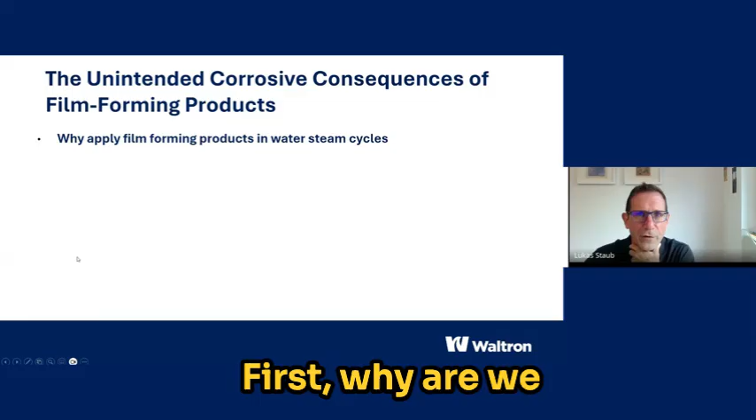Give you a quick overview on what we're going to talk about today. First, why are we applying film formers in water steam cycles? I just want to mention this is not a presentation of different film forming amines, film forming products. This is looking at the consequences of the applications. We have to look at what are the different FFAs and FFP classes that you find in the literature, and then what are the effects of FFPs, how do they work in general.

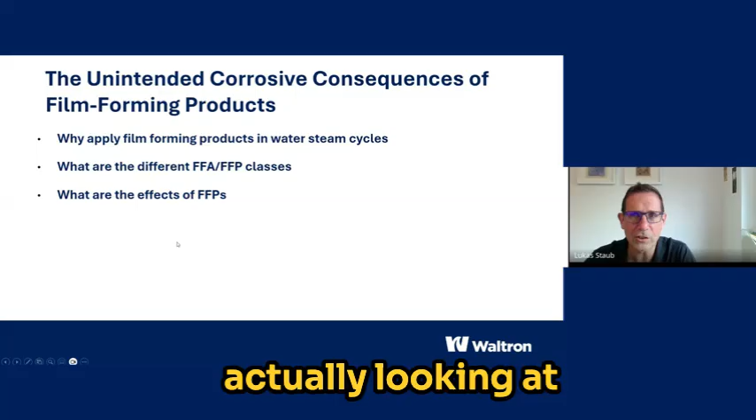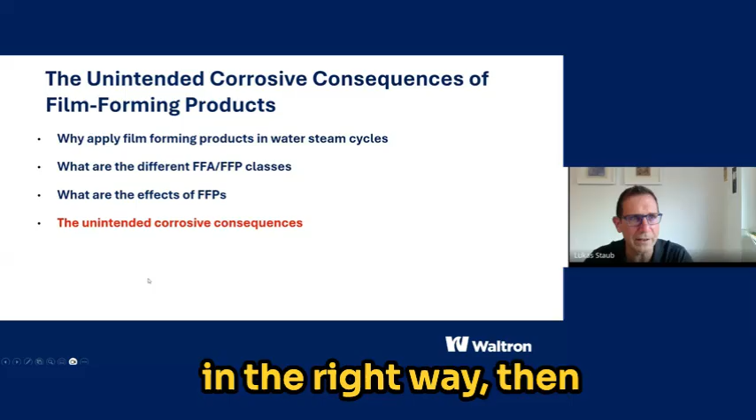Again, I'm not going to go into the deep chemistry of the different products. The vendors of those need to do that. And then what we're actually looking at is the unintended corrosive consequences. It had this undertitle in the advertisement of the webinar, the unintended corrosive consequences of film forming products. Again, the chemical mechanisms and what the corrosive consequences are if FFPs, FFAs are applied, overdosed, or not applied in the right way - we're not going to go into too much detail.

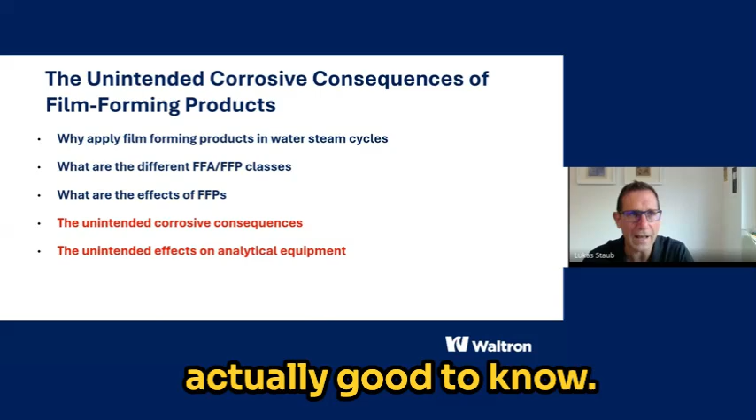Where we're going to dive in a little deeper is the unintended effects on the analytical equipment. This is an interesting field, and we as an instrument manufacturer have done some studies that are, of course, showing some effects on instrumentation, and these effects are actually good to know. We're also going to talk a little bit about mitigation strategies. Again, this is focused on how do I make my equipment run reliably, rather than the unintended corrosive consequences and how to mitigate that - that's other experts' field to deal with.

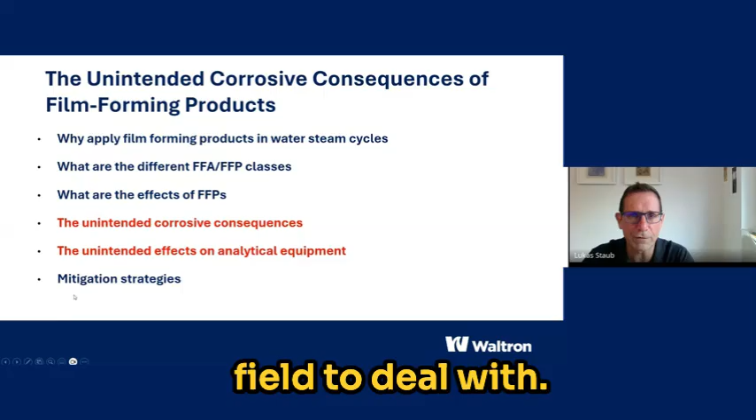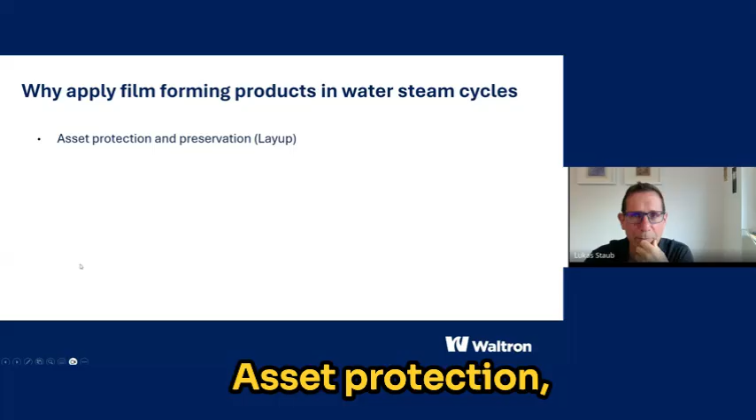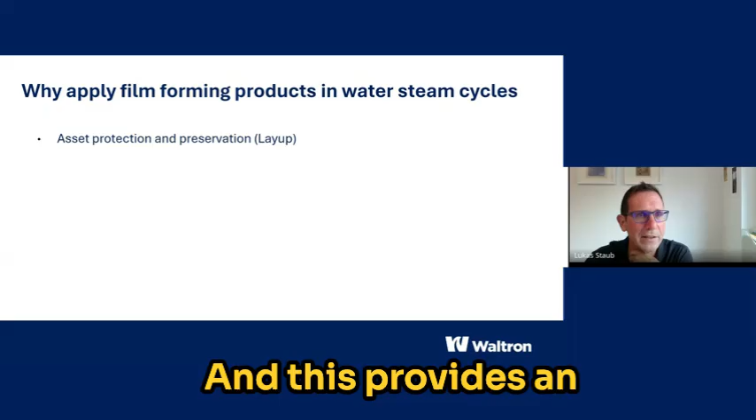Now, why do we apply film forming products in water steam cycles? There is a couple of commonly known reasons for that. Asset protection, preservation of layups. Film forming products establish a barrier that remains intact during operation, but also in offline periods of plants, and this provides excellent protection during operation, but also when you're looking at wet and dry layups without the need for extended nitrogen blanketing or dehumidification of the whole installation.

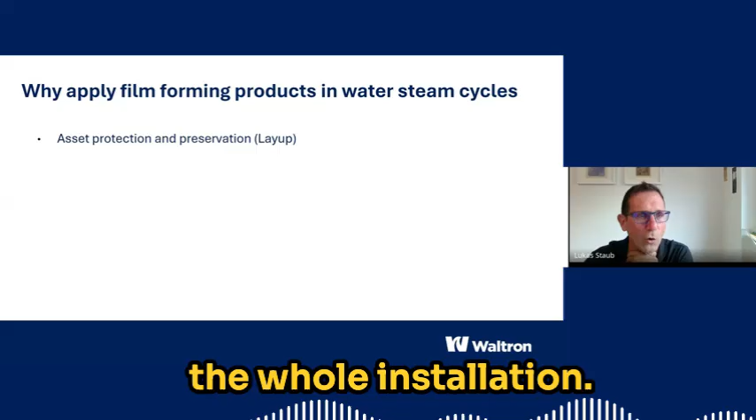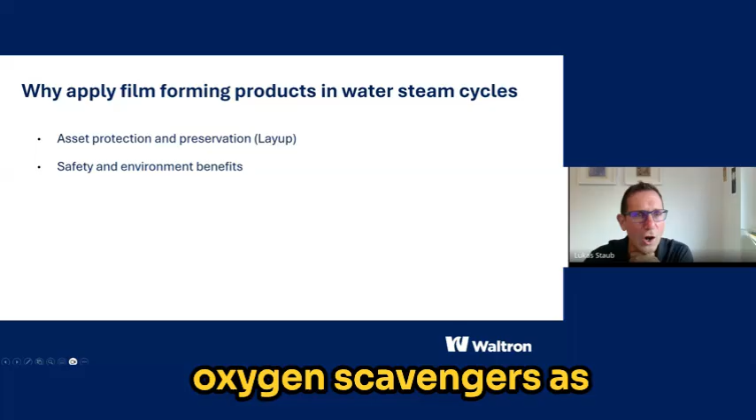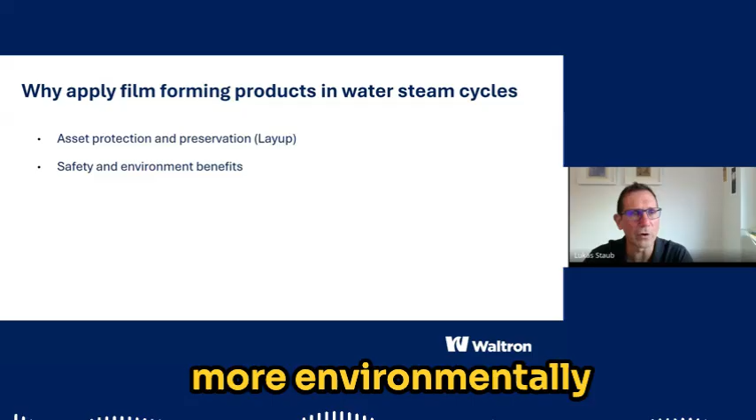Sometimes people also talk about safety and environmental benefits. This is mostly related to plants that are applying oxygen scavengers, as some of these FFPs and the mixtures of products that are applied then are said to be less toxic and more environmentally friendly than, for example, hydrazine when that is in use as an oxygen scavenger.

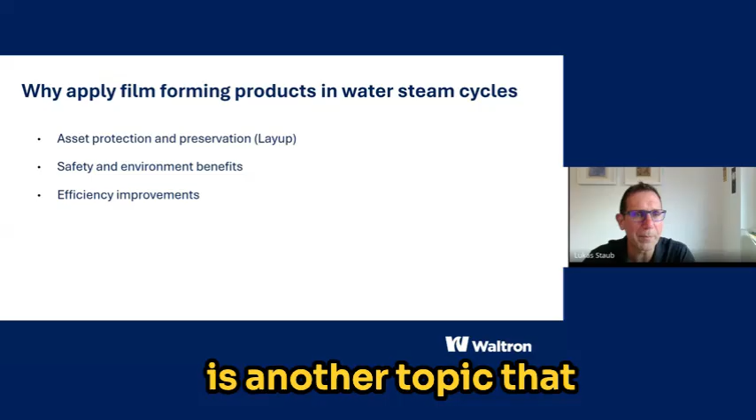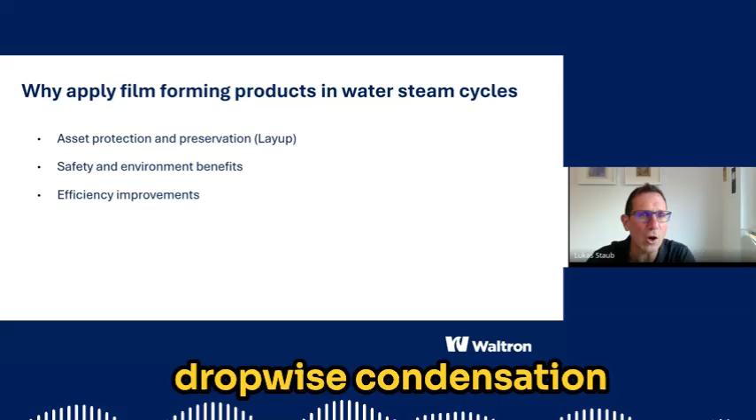Improved efficiency is another topic that some people like to talk about. By keeping heat transfer surfaces clean with the application of an FFP or an FFA, and promoting actually a drop-wise condensation rather than a film-wise condensation, for example in condensers, that could actually significantly improve the efficiency or the heat transfer.

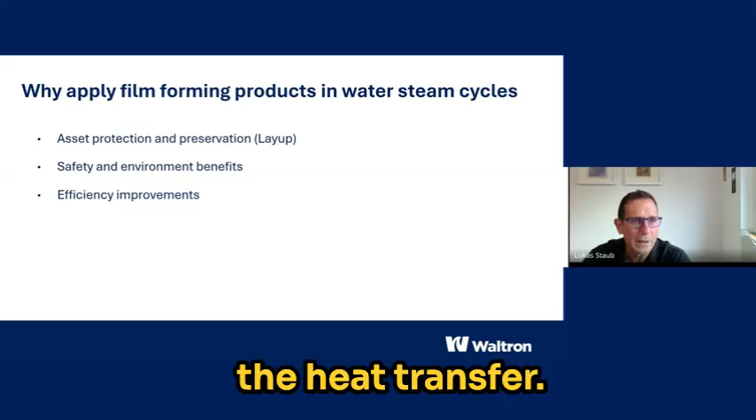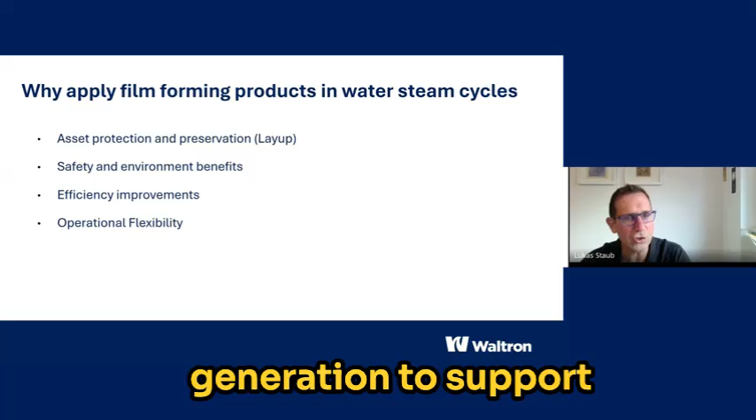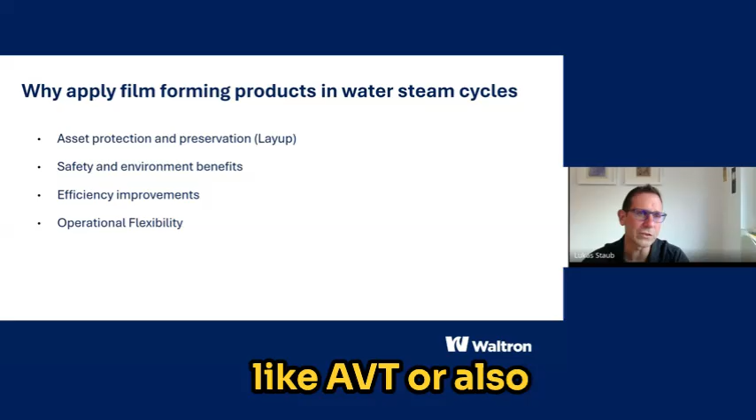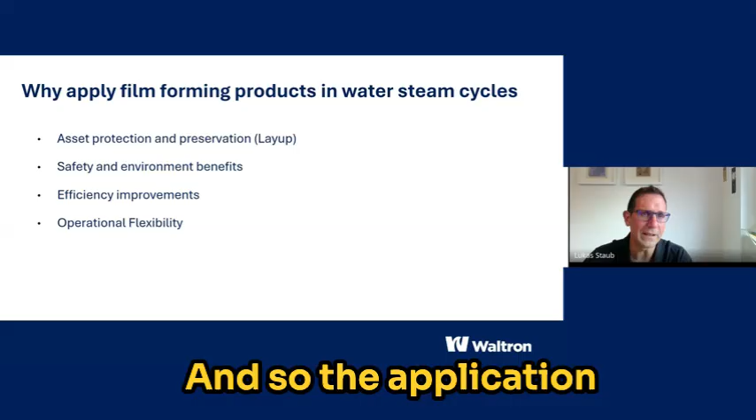Another topic that people mention when applying FFAs a lot is operational flexibility. As power grids shift towards flexible generation to support renewable energy, plants experience more frequent startups and shutdowns, peak shaving operations. Traditional treatments like AVT or phosphate treatments in boilers have limitations in protecting assets when you're looking at the cycling operation of these plants. So the application of FFA can, in certain circumstances, actually support the mitigation of corrosion formation in those plants.

What are the different FFA classes? We generally find three different classes in the literature. The literature talks about film-forming amines.

They're called in the literature FFAP. These are commonly blended products that contain an active film-forming amine, an FFA essentially, combined with other components like alkalizing or neutralizing amines, emulsifiers, reducing agents, and so on. Details on that are a topic for the suppliers of these substances.

The last class found in the literature is the film-forming products, the FFP. These are products that have the same film-forming properties, but are not amine-based. They often belong to a surfactant family, may contain carboxylate groups, and so on.

At the end of this presentation there are two pages with references of documents that can help you get an overview of what kind of products are available and what classes of products are applied in various situations of operational plants, and what kind of plants you're looking at.

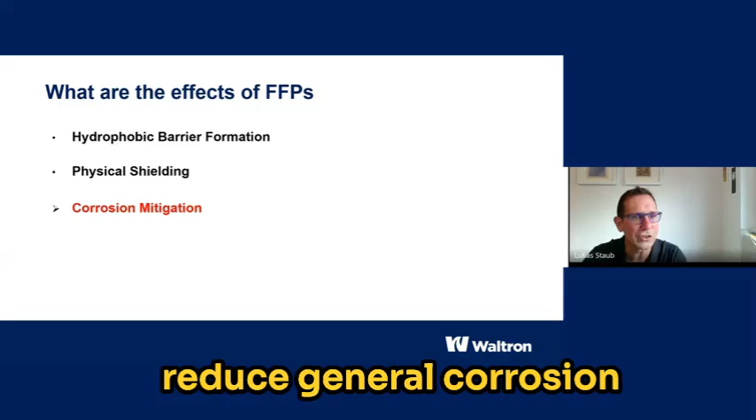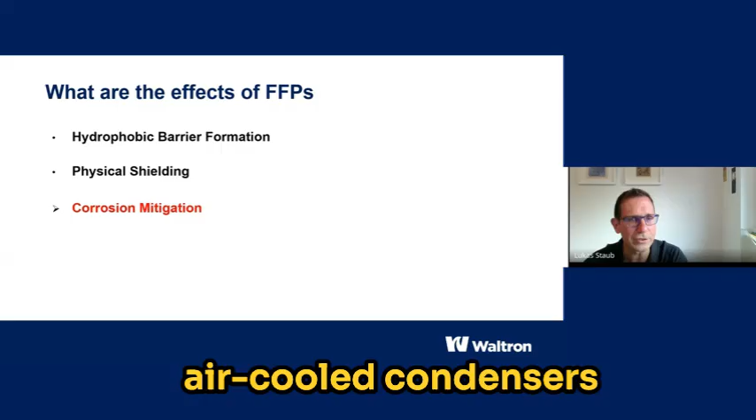So in general it can be said that both of these mentioned effects are intended for corrosion mitigation. The FFPs intend to reduce general corrosion, mitigate flow accelerated corrosion in both single and two-phase environments, like what we can find in air-cooled condensers and heat recovery steam generation.

Now, just a really quick overview of the unintended corrosive consequences if those FFAs are applied in the wrong way, in the wrong application, in the wrong plant, in the wrong dose maybe as well.

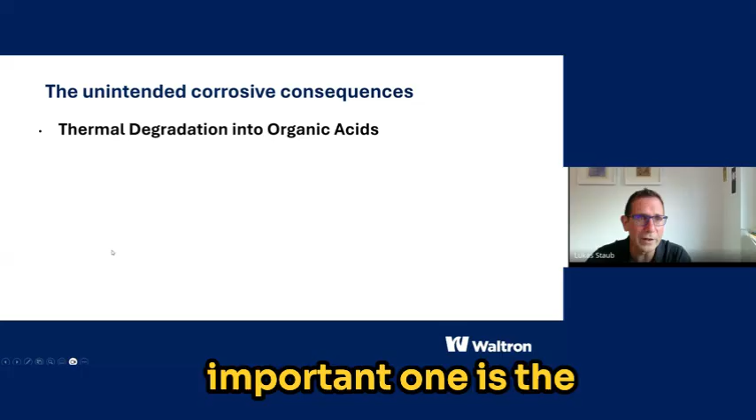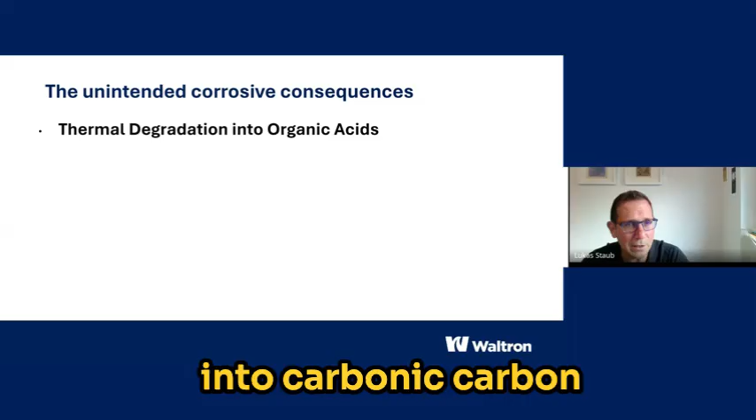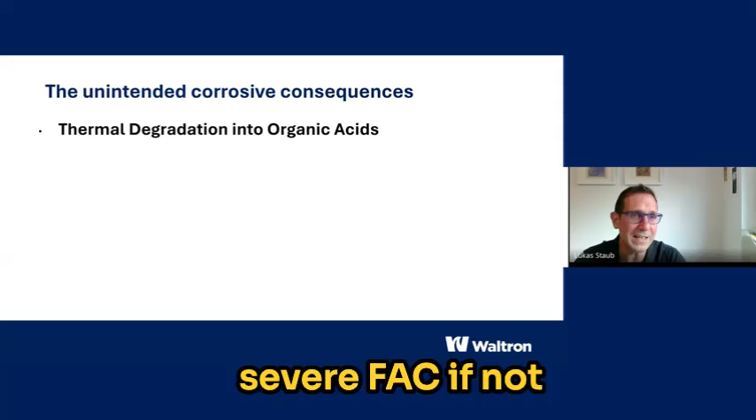One of the most important is thermal degradation into organic acids. FFAs and blended alkalizing amines undergo thermolysis, so they break down into carbon dioxide, which is not harmful, but also into lower molecular weight organic acids. That can trigger severe FAC if not treated in the right way.

Another phenomenon that is reported and studied quite extensively — again I'm going to refer to the documentation listed on the last two pages of this presentation — is that there is a lot of science behind under-deposit corrosion as well.

You can imagine this layer of FFA being on a metal surface. If you have, for example, a thick porous oxide layer beneath that without prior chemical cleaning, that can lead to severe under-deposit corrosion when this layer of FFA or FFP just gets stuck over an already corroded surface.

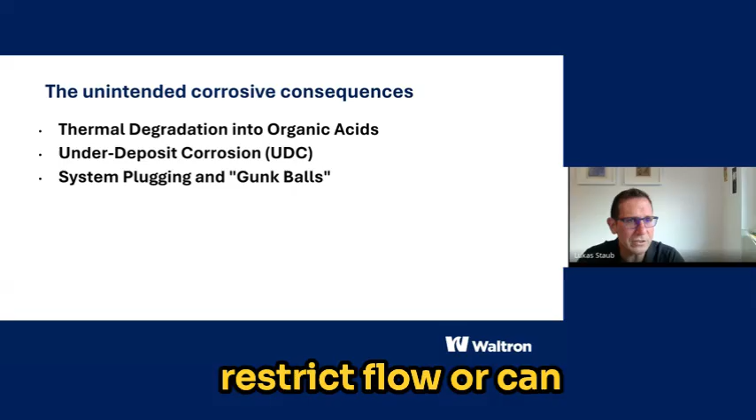Also an effect that can be frequently seen, mostly in conjunction with dosing issues, is system plugging and gunk balls, especially in sampling lines. You will find that deposits and excess chemical can form sticky gunk balls that restrict flow or can clog tubes completely, mostly in the low pressure part of the plant.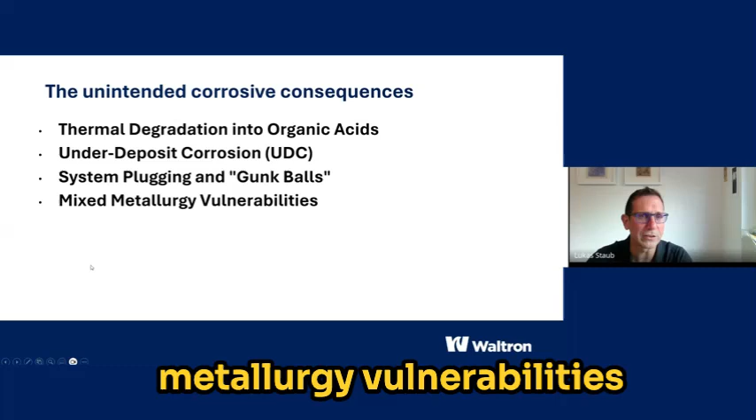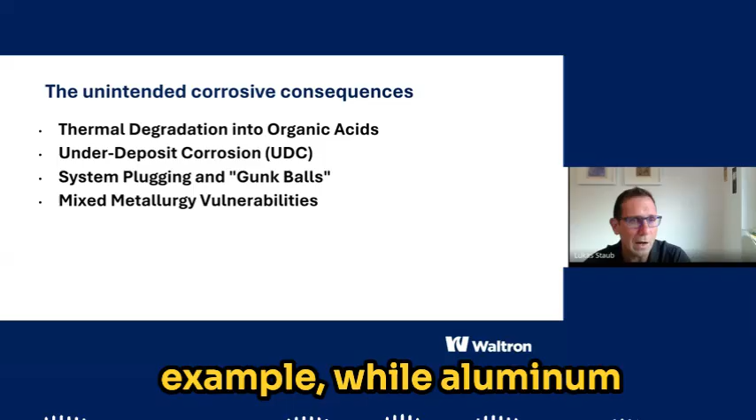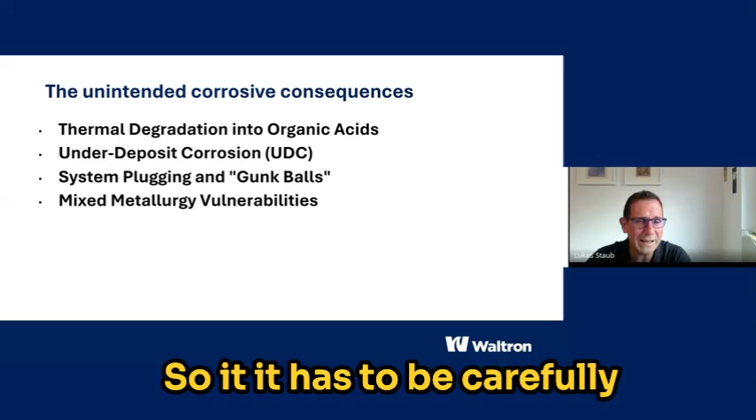Last but not least, there is also mixed metallurgy vulnerability to mention. Blended FFPs contain ammonia, which can cause ammonia grooving into copper alloys, for example, while aluminum components, if present in the plant, can suffer corrosion if pH is driven above 8.5. So it has to be carefully examined what kind of plant and components we are looking at before applying these film-forming products.

And now we're going to come to the unintended effects that such an application might have in terms of instrumentation, and what kind of mitigation strategy we can look at.

And this is where we're going to deep dive a little bit into different effects that you can see when applying FFAs, FFPs in general. I'm also going to run through a couple of tests that we have done back at our lab. Our head chemist was actually conducting most of this research, basically.

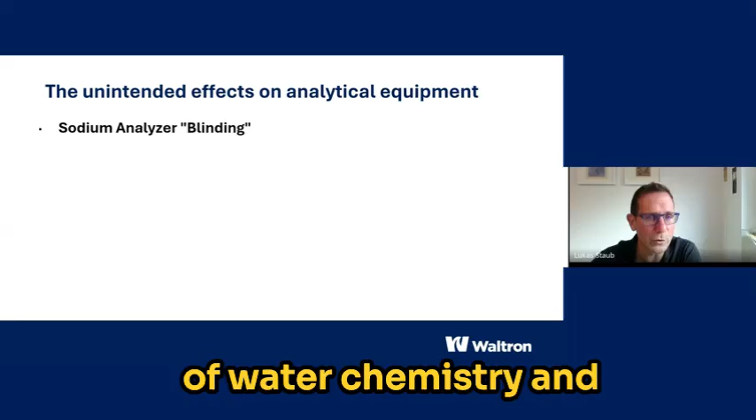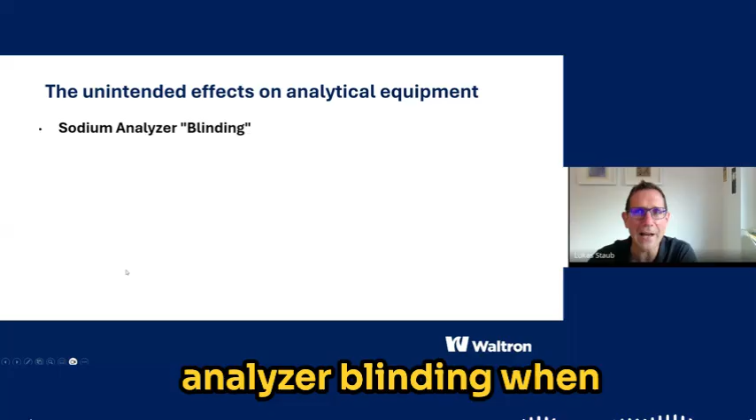I'm going to start with sodium analyzers. Sodium analyzers are essential for monitoring water chemistry and especially detecting any upset condition under operational conditions. So what we saw as an effect was some kind of sodium analyzer blinding when applying certain FFAs.

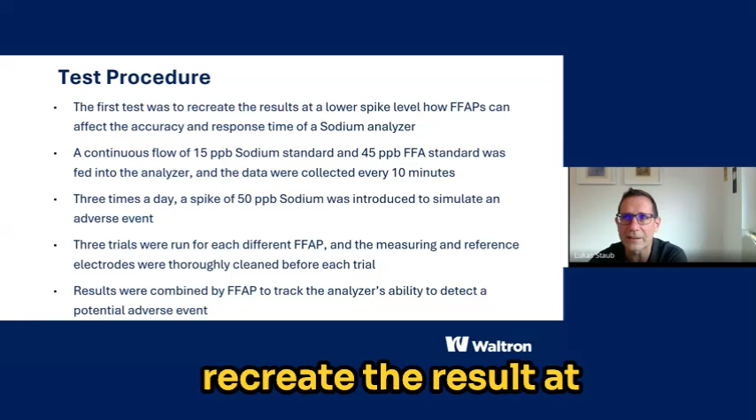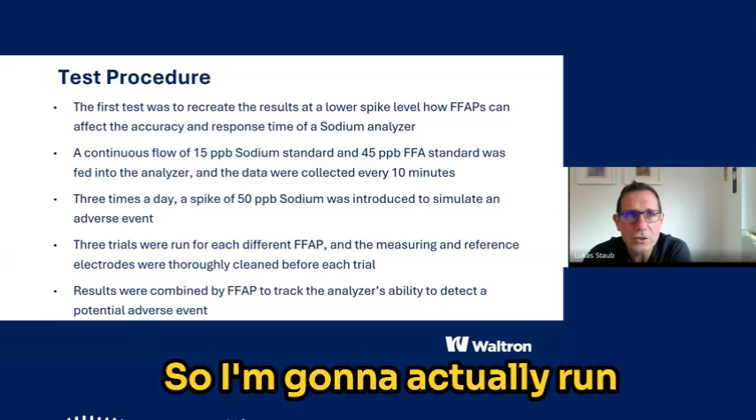Now here's a quick rundown of the test procedures. The test was to recreate the result at a lower spike level how FFAPs can affect the accuracy and response time, especially of sodium analyzers. I'm going to run through this real quick and show you the test setup.

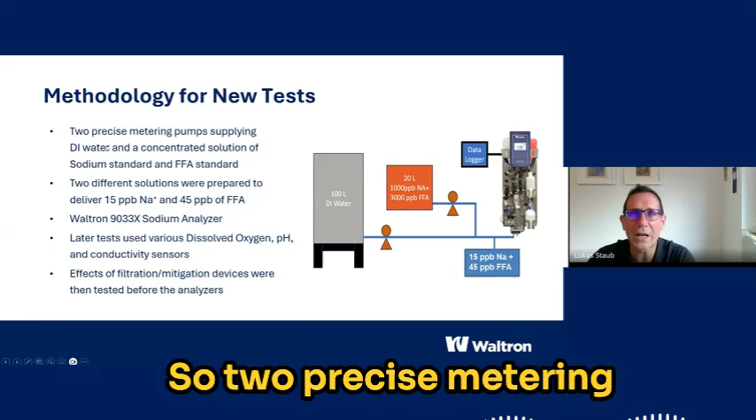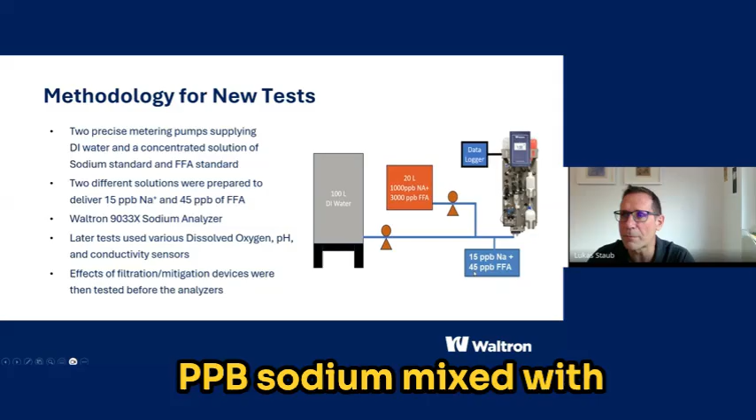So the methodology of the test, you can see this is the test setup. Two precise metering pumps are supplying DI water and then the concentrate of the sodium standard and the FFA standard, in this particular case using a 15 ppb sodium mixed with 45 ppb of a certain FFA. Actually, multiple FFAs were tested.

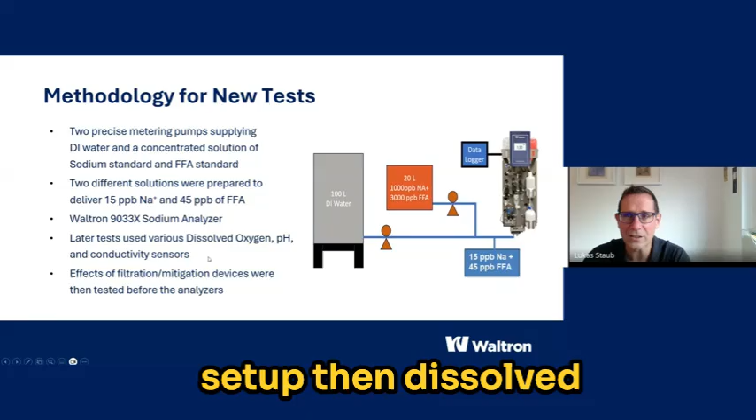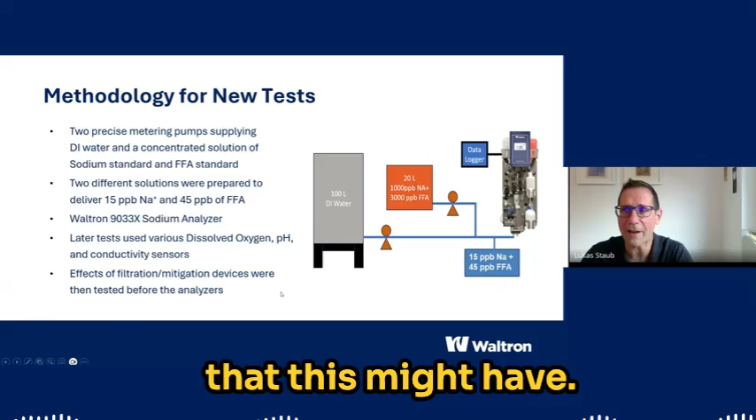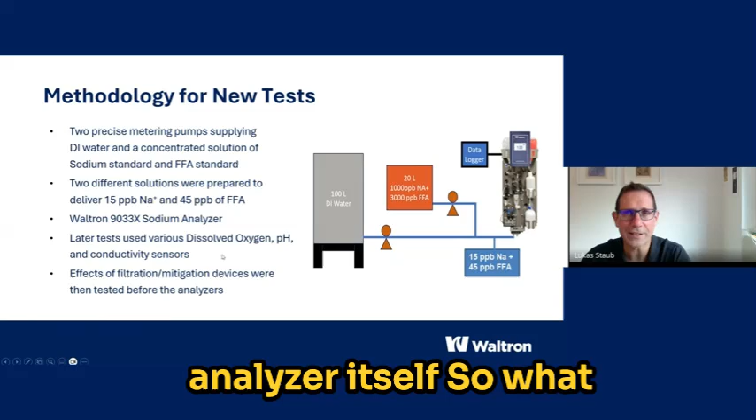This is the analyzer that was used for the test, and later tests also used the very same setup with dissolved oxygen analyzers, both Clark cells and LDOs, and then pH and conductivity sensors, where we looked at the effects this might have. Later we also studied effects of filtration and how we can mitigate the effects that the FFA has on the analyzer itself. So what was the initial finding?

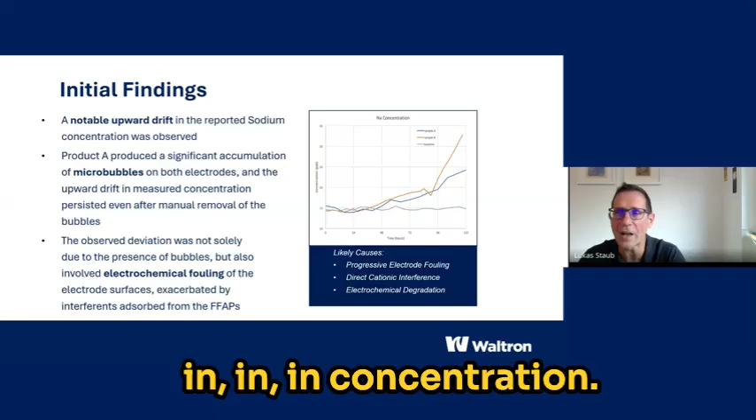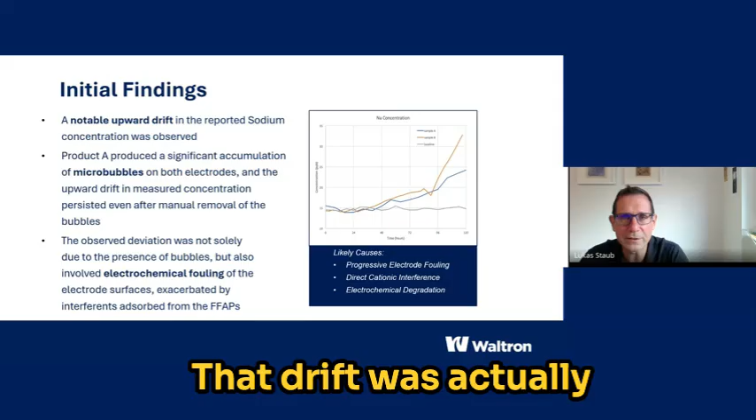The initial finding of those tests was an upward drift in concentration. One of the products tested showed a significant accumulation of microbubbles on both the electrode and the reference electrode, and that persisted even after manual removal of the bubbles. That drift was actually very persistent.

It was observed that this deviation was not solely due to the presence of the bubbles. Once we removed the bubbles, this upward trend actually continued, but it was some kind of electrochemical fouling of the electrode surfaces - interferents adsorbed from film-forming products.

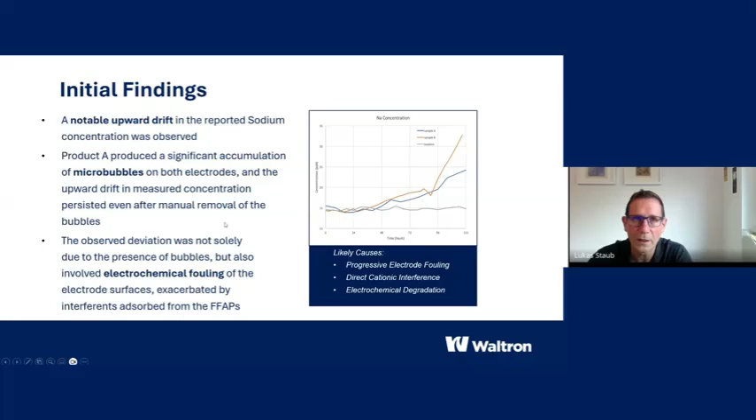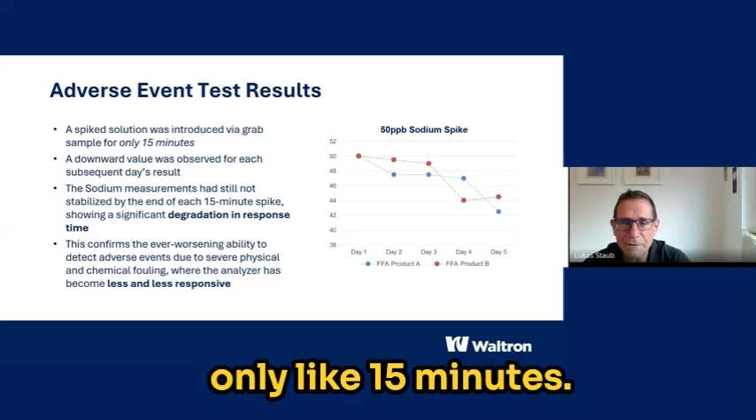What the test results were when we spiked a sodium solution, introduced by a grab sample for only like 15 minutes - basically what we did was inject a sodium spike, which would simulate an upset condition, a sodium ingress in a condenser leak case, for example.

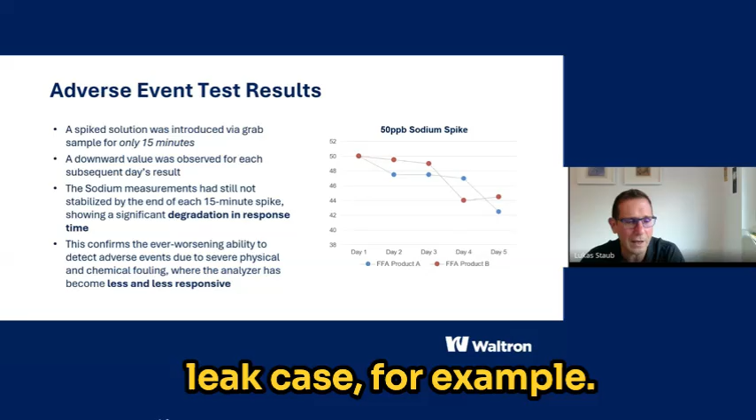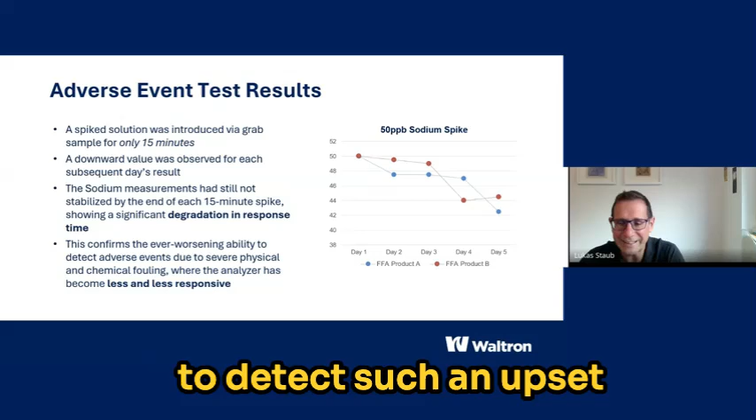And we can see that there is a downward trend value observed for the subsequent result, and this might now lead to a false reading. So after the application of a film forming product for 3, 4, 5 days, we might actually not be able to detect such an upset condition.

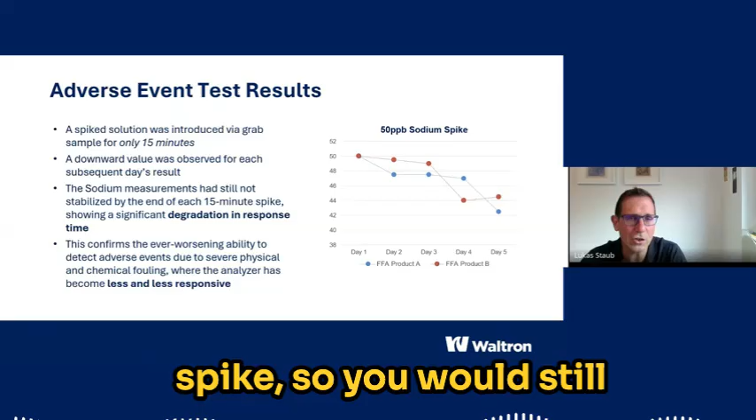So we won't see the breakthrough. Though it has to be said, 50 ppb is not a gigantic spike, so you would still see a breakthrough of a higher concentration sodium solution, but still we need to find a solution for this downward trend, and maybe a cleaning or filtration will be the solution. I'm going to talk about this a little bit later in the presentation.

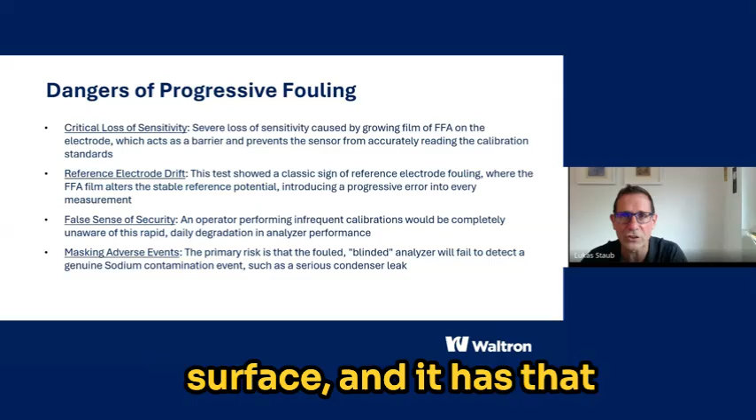In general, there is a critical loss of sensitivity, a severe loss of sensitivity actually, because the FFA tends to stick to surfaces. This is the job it needs to do when applied to a metal surface, and it has that same tendency within electrodes, of course.

Reference electrode drift, again, this is more electrode fouling actually, rather than a real drift or clogging or coating of the electrode. And that creates what I was just talking about, that false sense of security - you will not be able to see a spiked sodium introduction through an upset condition.

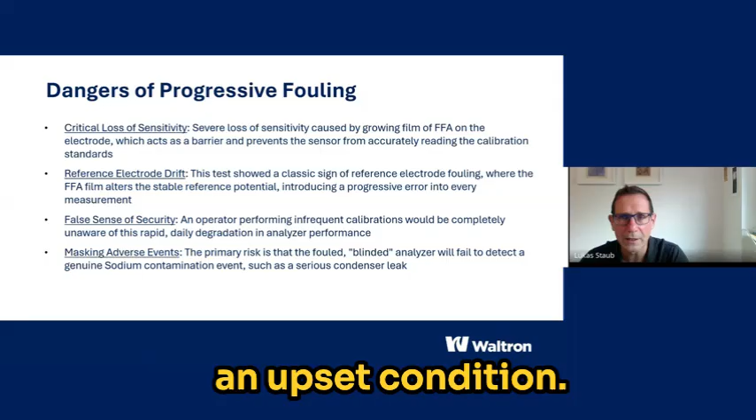I'm going to continue with probe coating on pH, ORP and conductivity sensors. Again, the same effects are going to be seen. When you apply an FFA, it's logical - this is supposed to cover a metal surface, and a standard conductivity sensor is nothing else but a metal surface.

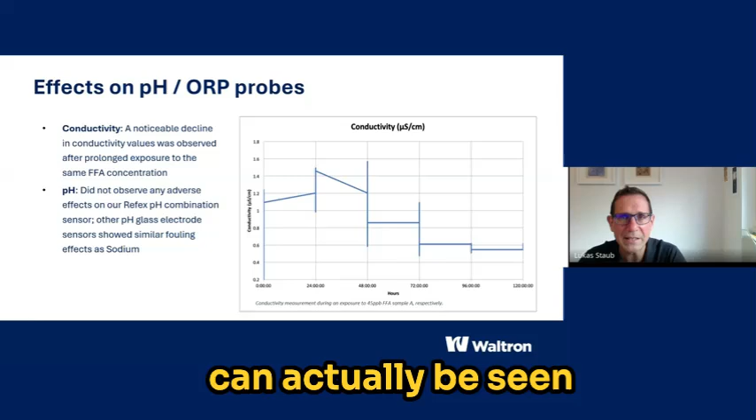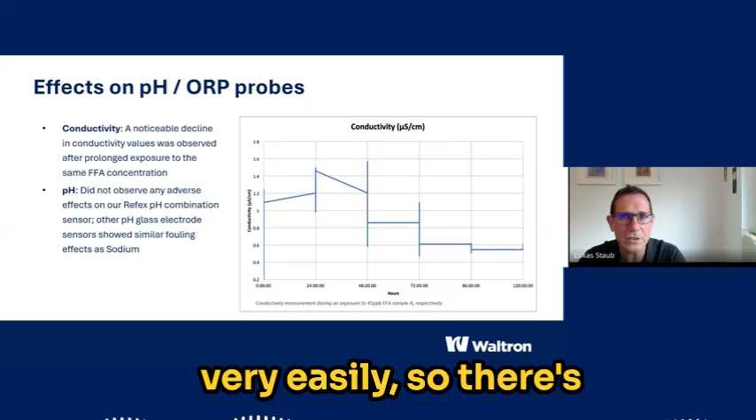And when you have a buildup of a film, conductivity values can actually be seen to be affected with prolonged exposure to the FFA concentration. The good news is that the sensors are cleanable very easily, so there's just a little bit more maintenance required if you're applying an FFA to make sure your probes are running.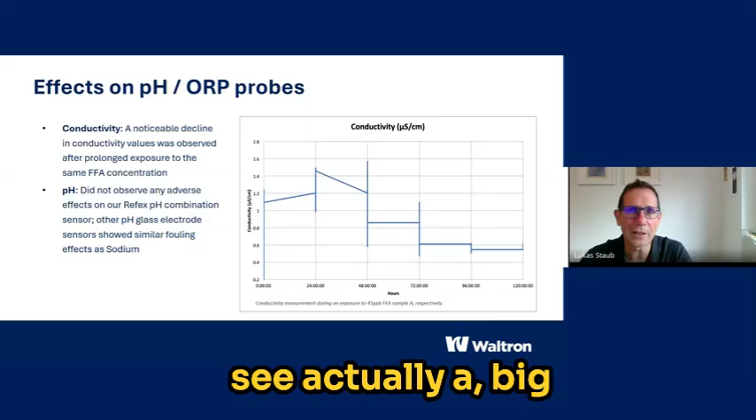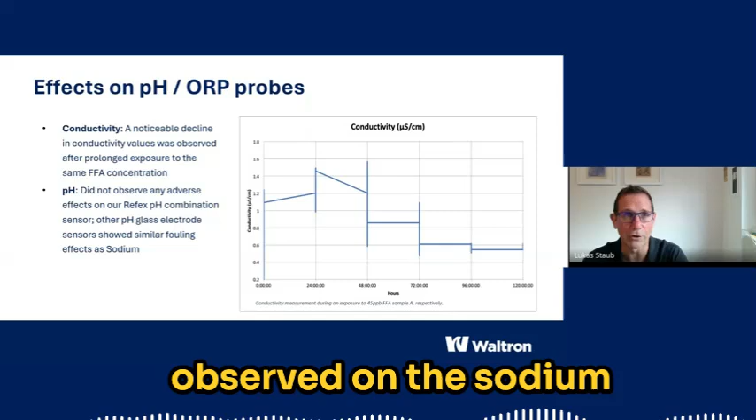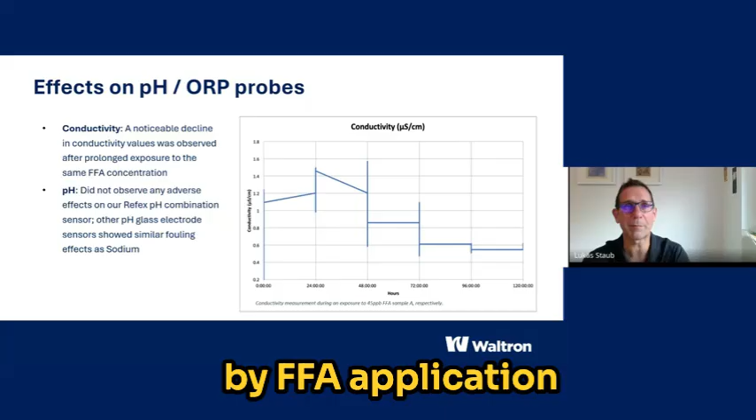On the pH side, we did not see a big effect on the Refex pH combination sensor. Other pH glass electrodes showed very similar fouling to what we've observed on the sodium electrodes. So there are obviously pH probe systems, reference systems, that are a little less prone to be affected by FFA application.

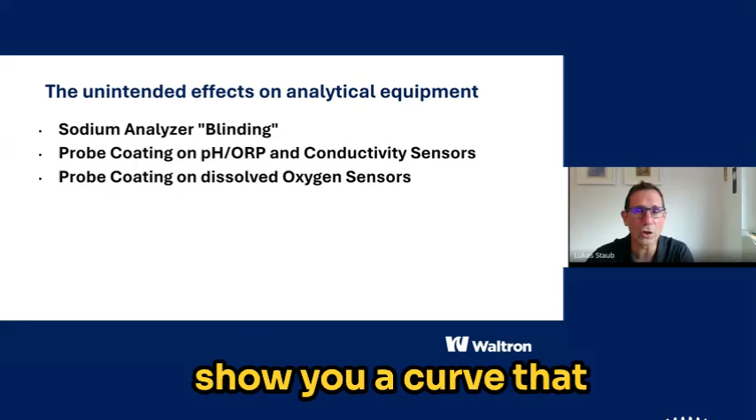Now, coating of dissolved oxygen sensors. This is a very interesting one, and I'm going to show you a curve that was done first with a Clark sensor, a standard membrane covered Clark cell.

It has to be mentioned that different membrane types, different membrane materials, do react differently to the application of a film-forming amine. The example you can see here has quite a dramatic drop in oxygen concentration. This is mainly clogging the membrane, and this effect has not been seen on a luminescent sensor, for example, because it doesn't contain a membrane.

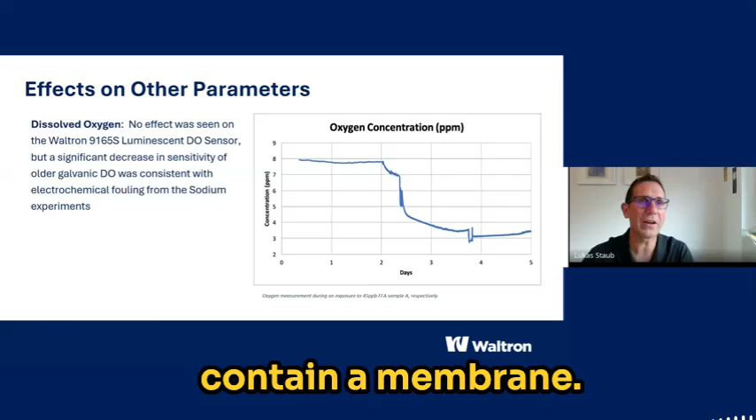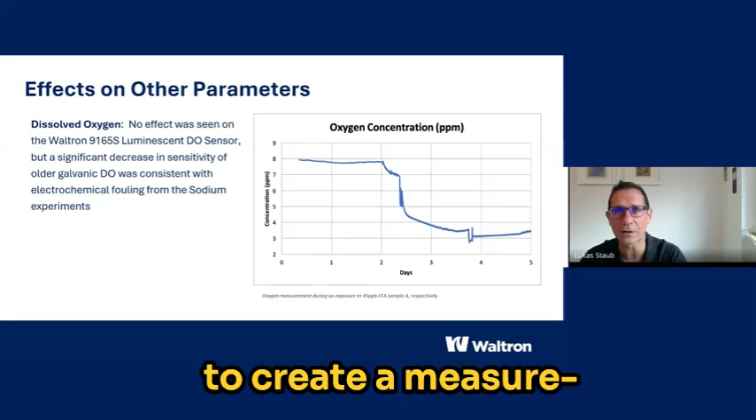Technically, it does contain a membrane, of course, but because it's not a diffusion membrane where oxygen needs to pass through in order to create a measurable signal at the measuring electrode, it doesn't have an effect on the reaction of the sensor. So no fouling can be seen with luminescence technology here.

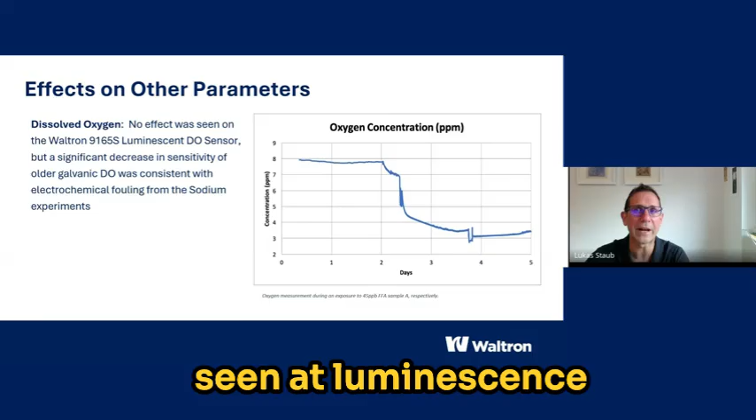Last but not least, I'm going to talk a little bit about elevated cation conductivity, or after cation exchange—that's the terminology used in the IAPWS papers, for example, in the IAPWS guidelines.

Of course, when I was talking about this decomposition process that you sometimes see in the application of film-forming amines, when that happens, there is also carbon dioxide being formed. Carbon dioxide is not a harmful contamination of your water steam cycle, but it will still actually show on the conductivity after cation exchange. Now, there is a pretty simple solution to that.

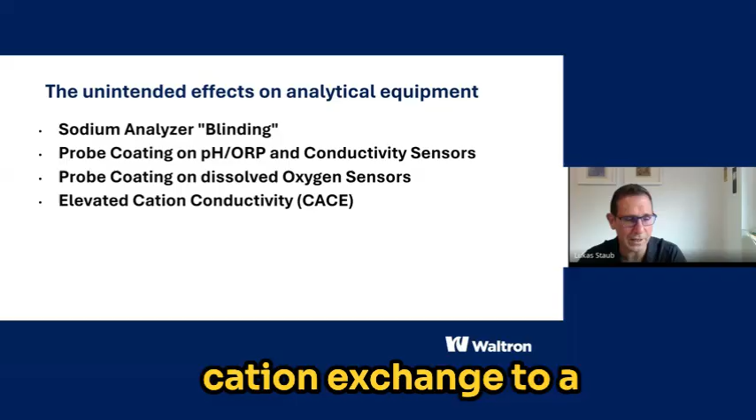You will probably just switch from a standard conductivity measurement after cation exchange to a degassed version, and you can eliminate mostly the effects of that.

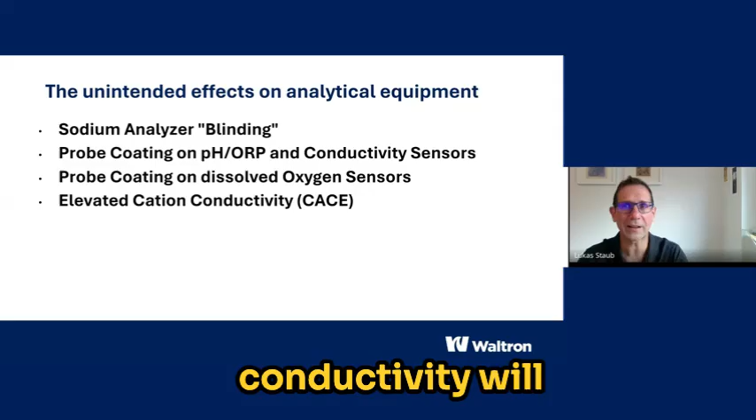What will still be seen on the degassed cation conductivity is actually the effects coming from these organic acids that are also decomposition byproducts of these film-forming amines. So you will actually see those represented in the degassed cation conductivity, and that is a good thing to have because you want to be warned about these decomposition products. So here the cation conductivity will actually give you a pretty good indication if there are decomposition products in the water steam cycle.

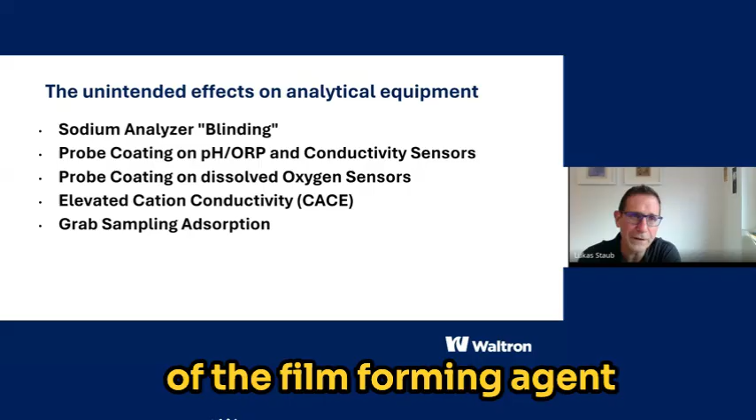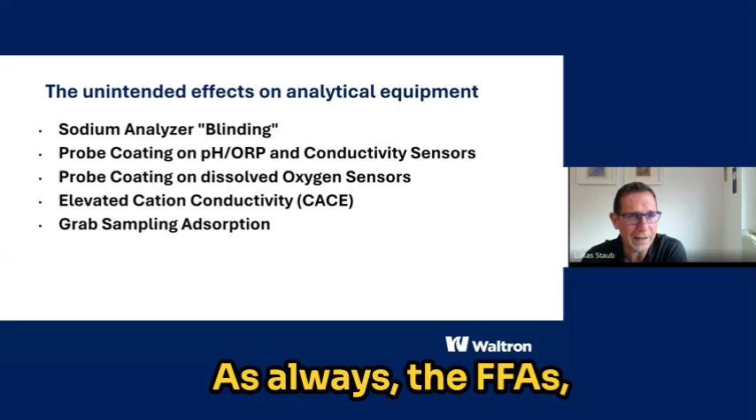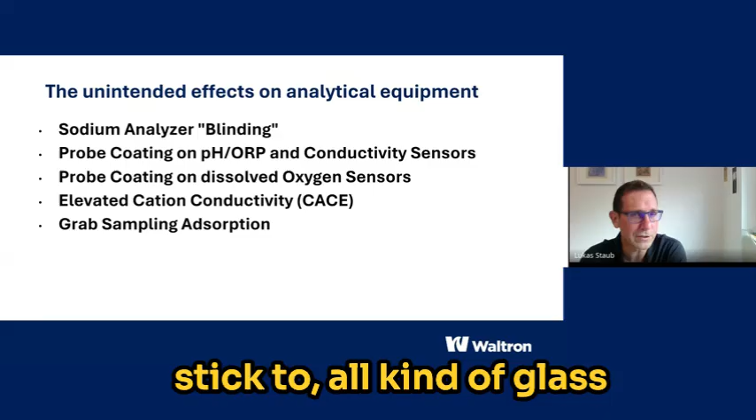Last but not least, I want to talk a little bit about grab sampling and adsorption of the film forming agent when you're doing grab sampling, especially when you're doing grab sampling for the residual FFA that you're using. As always, the FFAs, FFPs, they have a tendency to stick to surfaces, and so they do stick to surfaces of sample probes, sample tubes that are leading up to the sampling system, the SWAS panel, and they tend also to stick to all kinds of glass bottles and containers that you commonly use for your grab sampling.

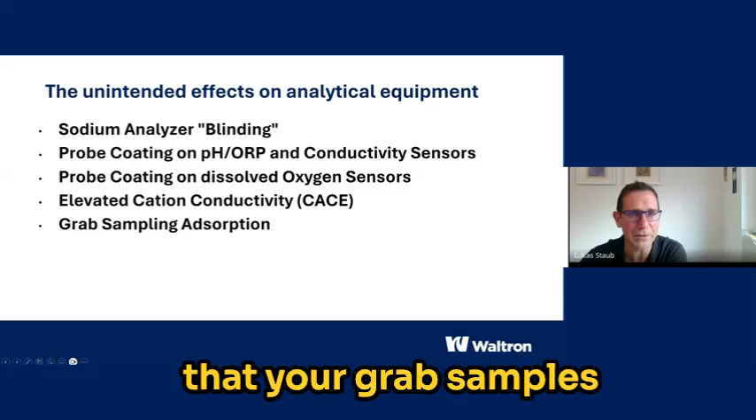So there is a certain protocol that needs to be established to make sure that your grab samples are actually going to be representative at the end of the day.

So let's talk a little bit about mitigation strategies. All we want to have at the end of the day is reliable chemistry monitoring and control. So there are a few steps that can help establish good monitoring and good practice in monitoring. I'm going to start with continuous monitoring of an FFA.

So there are various methods. Actually, to be exact, there are two analytical methods to detect low concentrations of film forming amines. Now, generally, there is no approved method available for any other FFPs or proprietary mixtures of FFPs, although some chemical suppliers do offer proprietary measuring equipment specific to their product. But it's not like you have a standard measurement application or a standard measuring method for sodium or anything else.

The FFAs, the classes that I mentioned at the very beginning—ODA, OLDA, OLA—these can all be detected with either the Rose Bengal or the methyl orange method. And there is online monitoring available. So continuous FFA monitoring, applied continuously, is certainly recommendable.

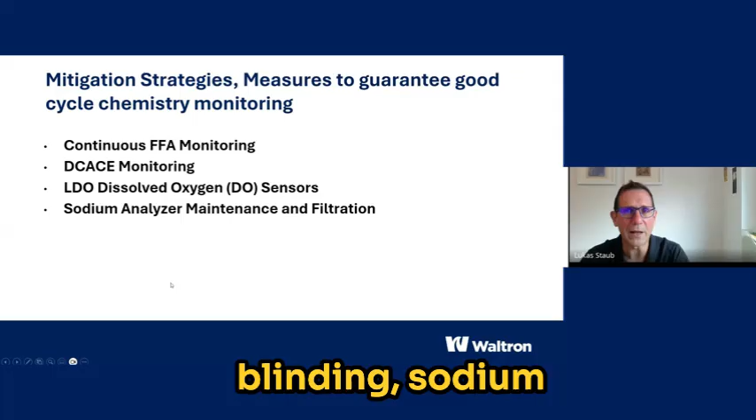Last but not least, to avoid sodium blinding, sodium analyzer maintenance and filtration, to some extent, operators must implement significantly shorter maintenance intervals and calibration cycles to prevent blinded sensors or missing a critical breakthrough. Enhanced cleaning - there is some instrumentation that does automatic cleaning using a combined mechanical and chemical approach. So there are various procedures that can be implemented to make sure that your sodium analyzer is actually reading appropriately and reacting in a meaningful time, so it's not slowed down in the measuring process.

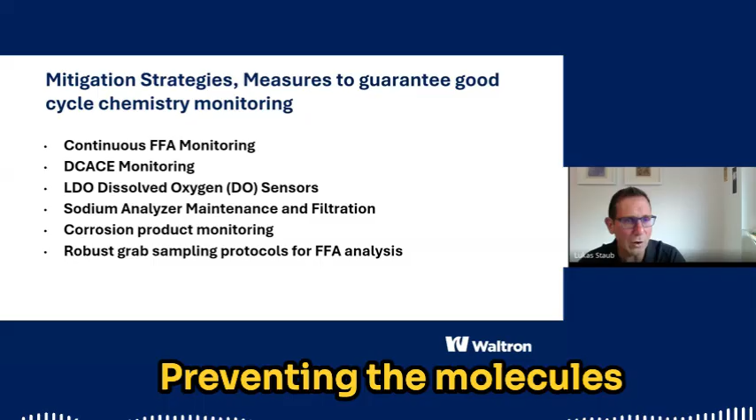And robust grab sampling protocols - that's one of the things I mentioned before. When you are actually doing grab sampling, make sure that sample lines are thoroughly flushed and samples should be captured in a PTFE, Teflon, or silicone-coated container, which has less adherence of the FFAs, so therefore doesn't bias the grab sample. Adding acetic acid to the sample container will adjust the pH and stabilize the FFA concentration. If you want to actually grab sample for the FFA concentration, that is a procedure that has also been described in some of the IAPWS guidelines for FFA application. EPRI has a similar guideline for that - preventing molecules from adsorbing to the walls prior to the analysis. That's the goal of that grab sampling protocol.